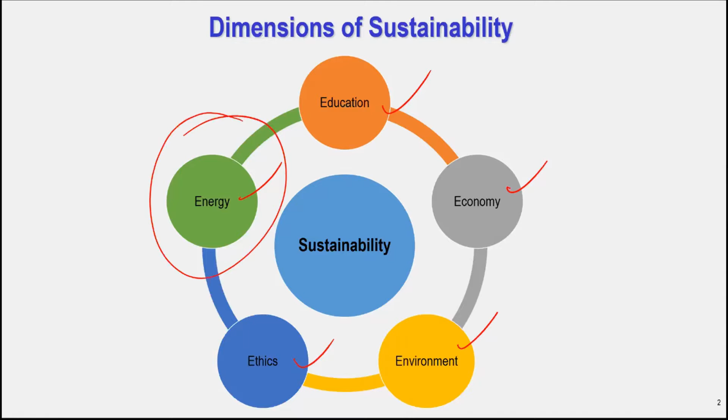So I see it is going to be very critical to study these dimensions. Of course, today my primary focus is going to be on energy. Before getting into that, we need to look at and understand what people need. People need 4 things: clean air, clean food, clean water, and clean energy.

This particular item, clean energy, affects each of these above. So really, water, food, and air are quite affected by the cleanliness or uncleanliness of energy.

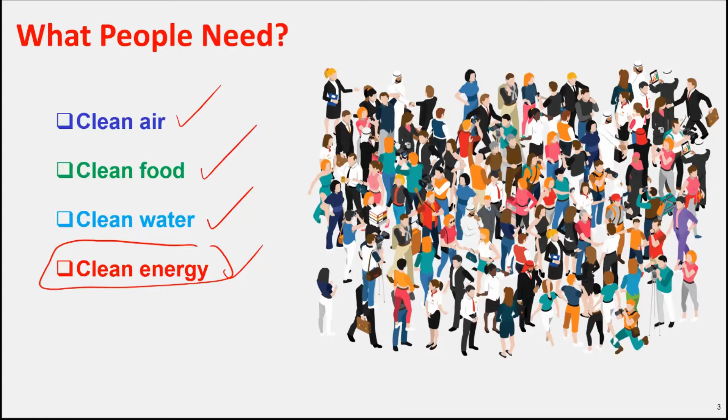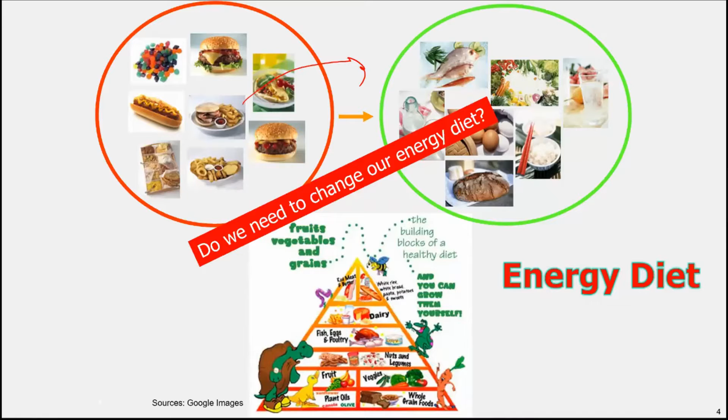And then we are now in an era where we need to change our energy diet, from a junky food diet into a healthy diet where we have renewable energy sources really deployed. And I'd like to get into this more and more now.

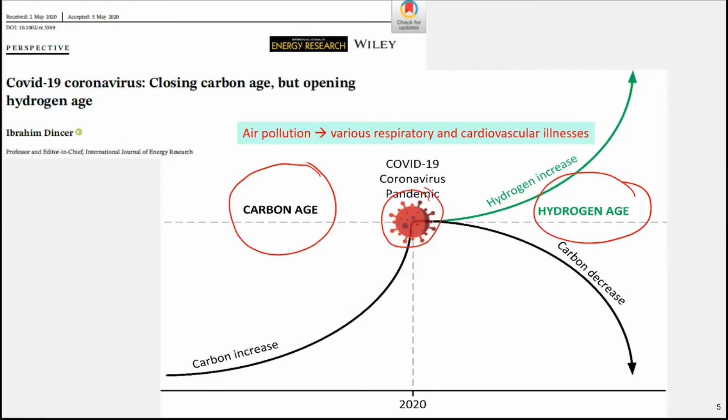I have this perspective article that I wrote just at the beginning of the pandemic in 2020, and I made it a kind of turning point, really changing the picture, a turning point from the carbon age into the hydrogen age. The pandemic has brought lots of difficulties and issues, but at the same time, opportunities for energy solutions.

And we need to look at the history of fuels. I always show this based on the carbon-hydrogen ratio. When we look at this, we see how humanity started with wood, later coal, oil, natural gas. When you look at this trend line, you see we are moving into a carbon-free period.

And this particular period is not going to be possible without hydrogen. So the key question: yes, hydrogen can be used as a fuel, and some people call it an energy carrier—you can store it, use it later, actively as an energy carrier. But more importantly, I see an even more critical role here as a feedstock.

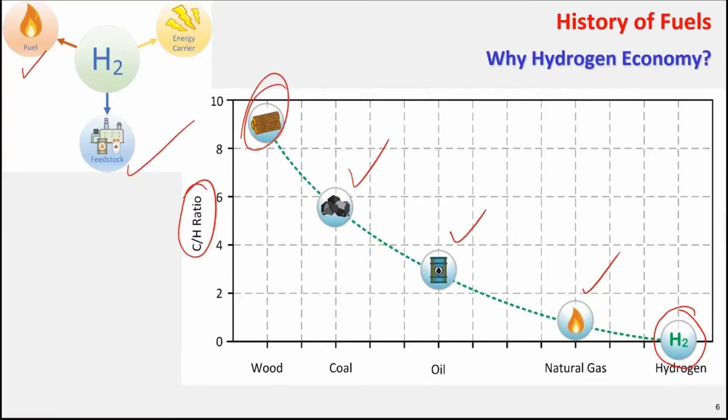When you have your hydrogen, especially clean hydrogen, you can synthesize other fuels and chemicals depending on the path you select, either with carbon monoxide or with carbon dioxide.

When we look at the sectors, really primarily the transportation sector, where we use fuels heavily, that sector is crying out. When we look at the world globally, we need to actually treat this, and we see a critical role for hydrogen to heal the world.

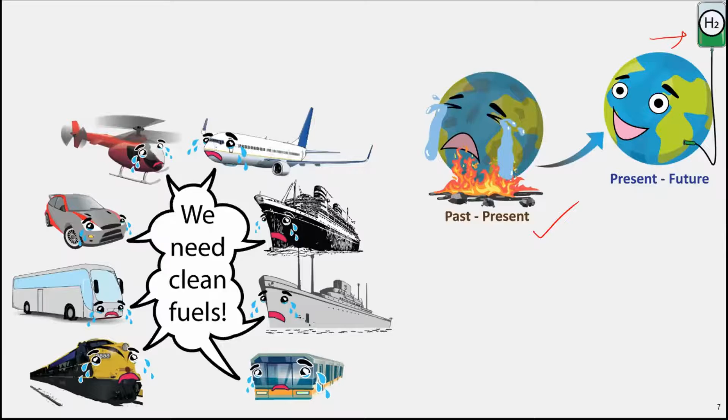So let's look at the global activities around this before getting into some specific research dimensions. The hydrogen energy ministerial meeting started back in 2018, then 2019 accordingly, same in Japan, 2020, and then 2021. The ultimate goal of organizing this and inviting leading countries to take part is a common goal: to develop a hydrogen powered society.

And various countries introduced their really appealing targets, and Japan made it very clear: in 10 years, 10 million hydrogen powered systems, including some vehicles, and 10,000 hydrogen refueling stations, etc.

And also, we need to look at the world's hydrogen production. When we look at it, in early 2019, we see it's really primarily by fossil fuels—natural gas, crude oil, coal—with only about 4% by electrolysis.

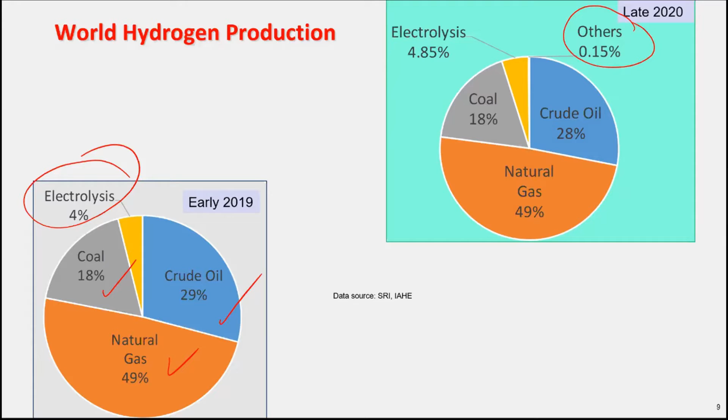And when you look at it, only a very small percentage is using renewable electricity. We also do life cycle assessment—it's really critical to look at the life cycle assessment when it comes to hydrogen production methods. And the life cycle emissions, if you try to produce hydrogen out of fossil fuels, are still remarkable.

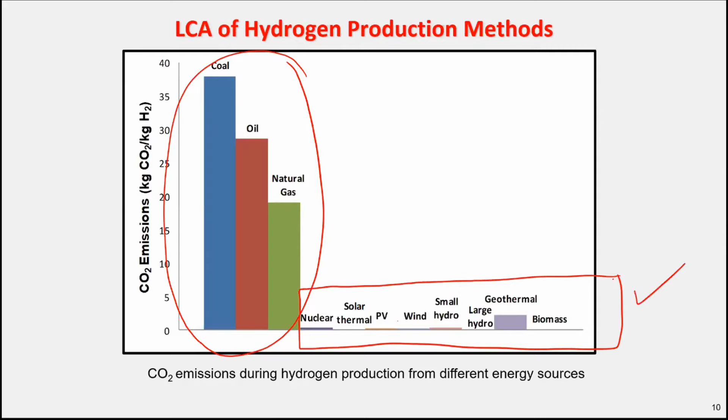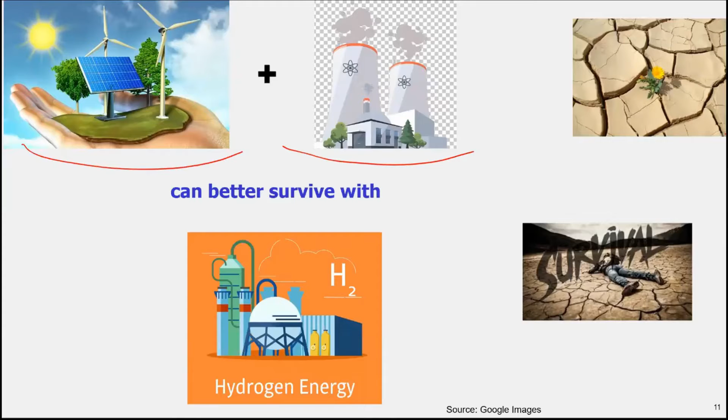And I make my equation similarly by saying that renewables and nuclear are going to better survive with the hydrogen energy options. So really, this is where we need innovative solutions related to hydrogen for implementation.

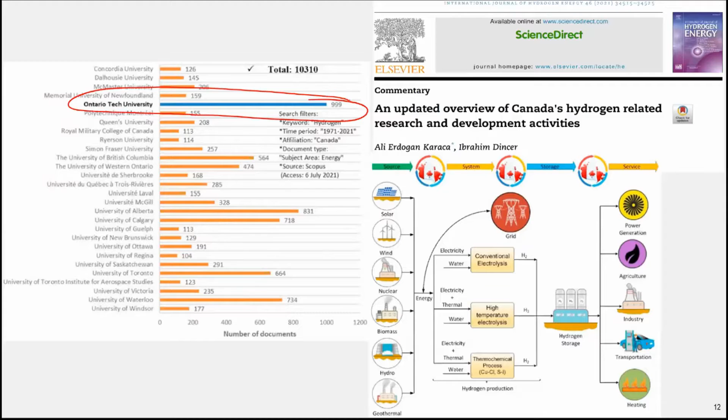Recently we have done some publications, perspectives, and commentary to look at Canada's hydrogen related research and development activities, from the publications point of view, technology developments, patents, and other related activities, and to see how well the universities are doing. We are really leading in this area in terms of publications, theses, and other related outcomes.

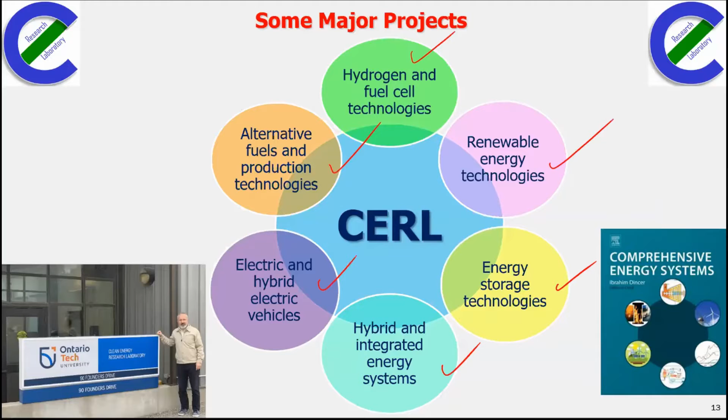In my lab, my research portfolio is quite diverse, covering hydrogen and fuel cell technologies, renewable energy technologies, energy storage technologies, hybrid and integrated energy systems, hybrid and electric vehicles, pure electric and hybrid electric vehicles, and alternative fuels and production technologies. These overall cover my research portfolio.

In regards to hydrogen production, this was actually my keynote talk in 2017, where I initially introduced the 18S concept. This concept is becoming very critical, especially when dealing with hydrogen production, looking at what items will be really critical and the domains involved. I introduced this 18S concept, starting with safety, scheme, sector, solution, stakeholder.

Overall, the 18S will be very critical, and this is going to be something very important, not necessarily limited only to hydrogen production. One may extend these to also cover storage, distribution, and primarily the final step, utilization.

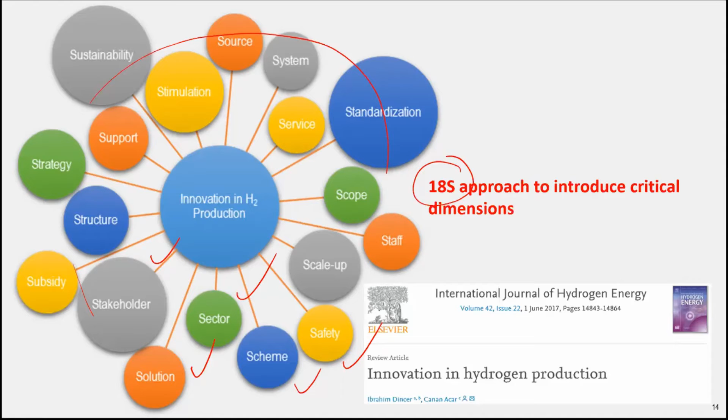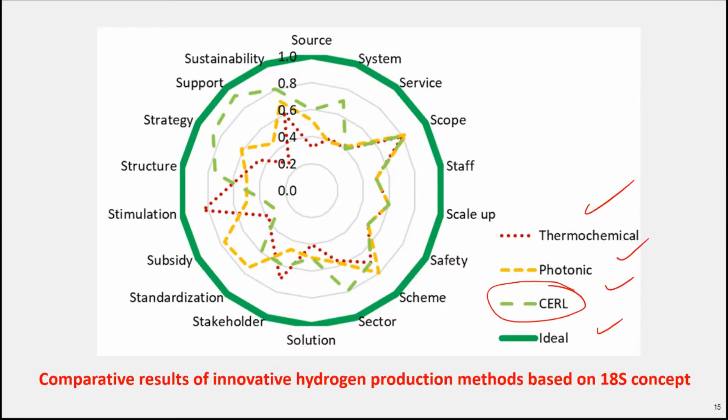We have looked at this and started doing the ranking based on technologies we have developed. The ideal case, if we take this ranking between 0 and 1, 1 is going to be the ideal case, and 0 is the worst. We try to look at all these and accordingly do the ranking for various technologies. This is just an illustration covering one of the assessments. So we have been developing technologies in my lab, trying to cover as many of these items effectively and efficiently.

At the same time, hydrogen hub development is very critical. I led a project related to a feasibility study on the development of the Oshawa Hydrogen Economy Hub. The prime purpose was really under 3S: source, system, and service.

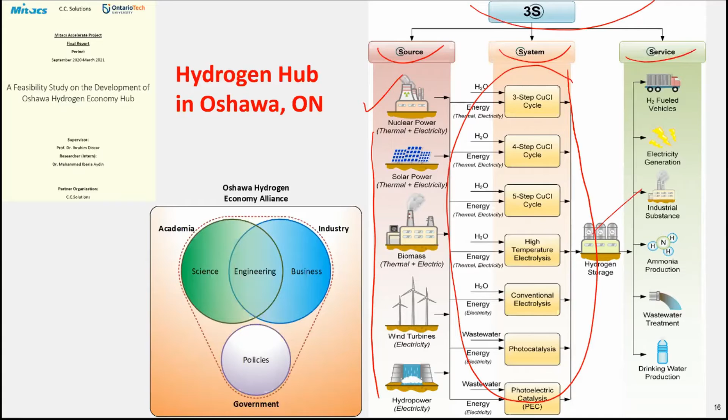For source, we looked at what sources potentially we have got: nuclear, especially in Ontario, specifically in Oshawa, and also additionally renewable energy sources. We then looked at the technologies we developed to be able to use in developing the hub. The key requirement is really hydrogen production, and then producing hydrogen and supplying it to various sectors. We did feasibility studies and compared other options: renewable hydrogen, nuclear hydrogen, and using the existing grid electricity to do the electrolysis.

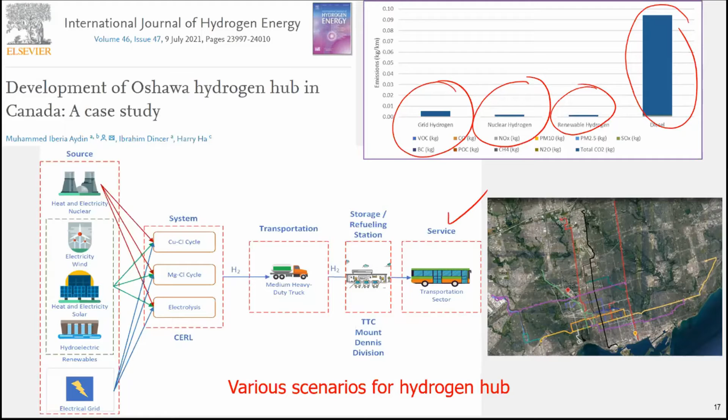The base case was with diesel. When it comes to the transportation sector, especially public transportation, because they needed this solution, we looked at having the university primarily responsible for hydrogen production, using various technologies we developed, and supplying to the transportation sector. That was the primary purpose.

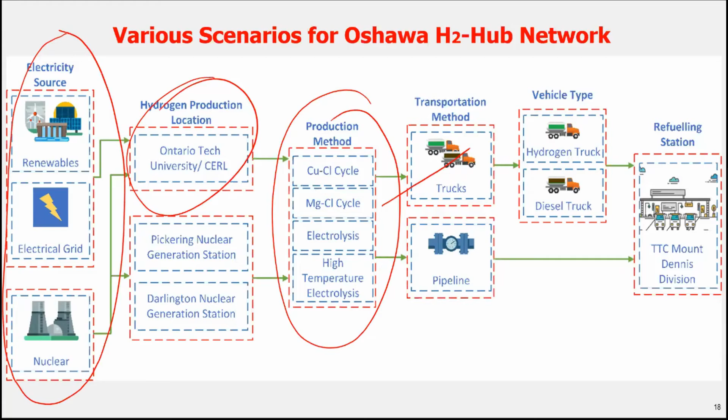As mentioned, the sources were nuclear and renewables, and also the existing grid electricity was considered in terms of comparisons.

And also similarly to look at really four cases: diesel bus public transportation, compressed natural gas, battery electric bus, and fuel cell electric bus. Technically, the fuel cell electric one is making it the most environmentally benign. But economically it's not better than battery based on current prices. But now the target is really $2 by 2030, so eventually this is going to be more cost effective.

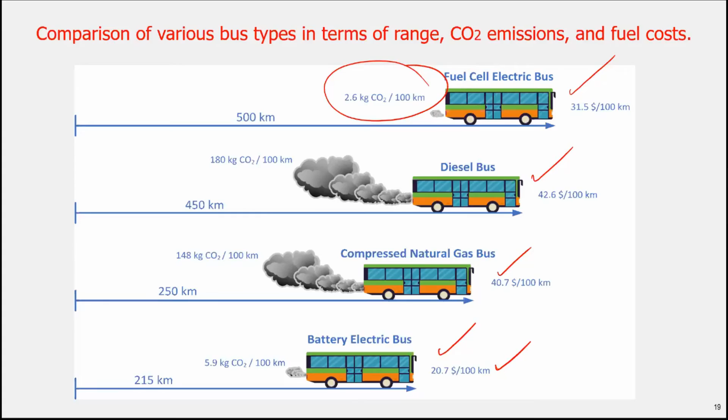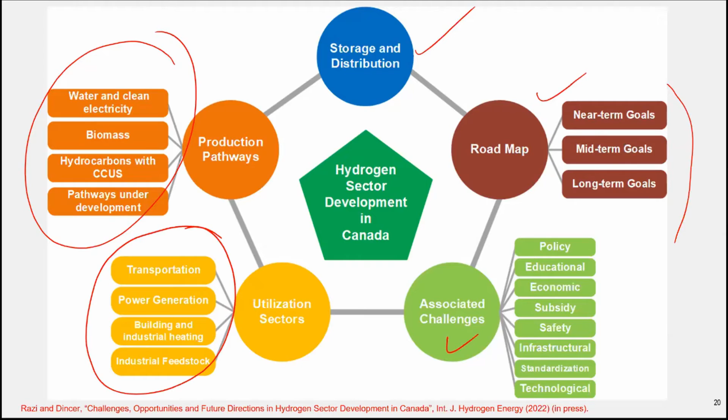Also studying various options, because sector development is very critical. I carried out a specific project for the government to look at hydrogen sector development in Canada. This item was really to look at various domains: production pathways, utilization sectors, storage distribution, and the roadmap, making it short term, mid term, long term, as Canada decided to be carbon neutral by 2050. So this is really important, developing the roadmaps accordingly, and then changes required in policy, education, economy, etc.

So becoming very critical - looked at the sector development, and also hydrogen production and distribution is becoming another important factor, including delivery and dispensing cost. We looked at various cases countrywide to see how much additional cost comes from delivery, and how much the price is affected by this. These give some additional figures in terms of compressed hydrogen or liquid hydrogen, and the delivery distance from 100 kilometer to 500 kilometer, to consider and compare.

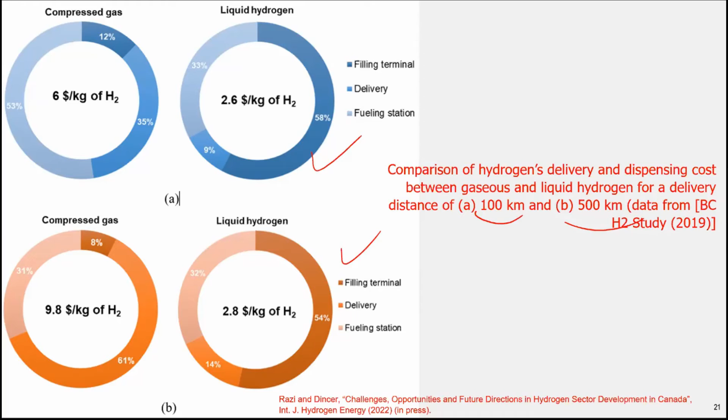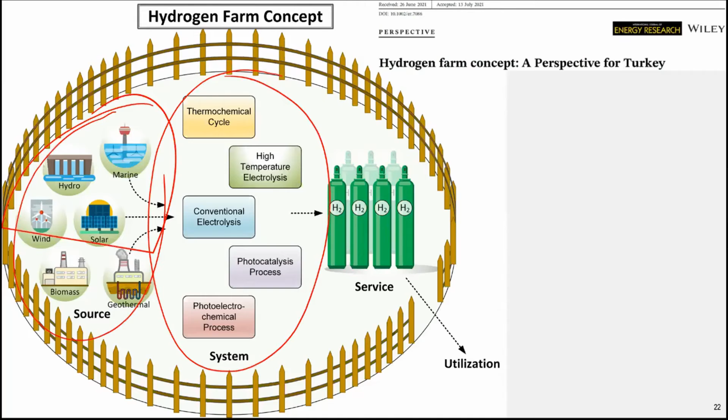Additionally, a recent study to develop the hydrogen farm concept, which I did for Turkey as a specific application and countrywide case study to look at renewables. We have the renewable energy sources, and then potentially using the technologies we developed, producing hydrogen and utilizing it in the various sectors of the country.

This was done for the country itself, looking at all renewables from solar to wind, geothermal, hydro - including large and small - and using wind onshore, offshore, and even marine and undersea currents, to look at it overall for every location and every city. 81 cities exist in Turkey, and we looked at it, including even biomass options with wastes, which are considered as well.

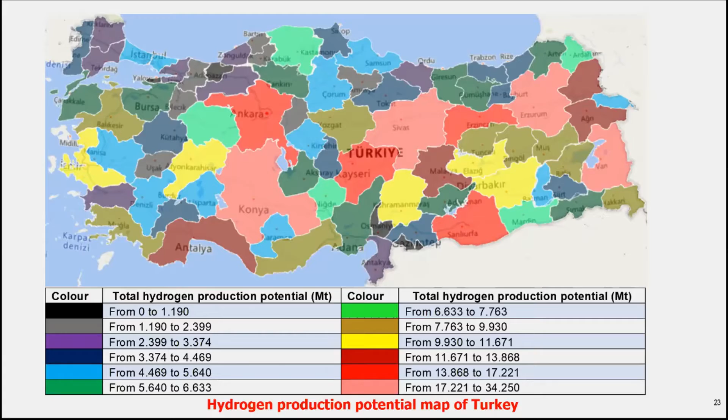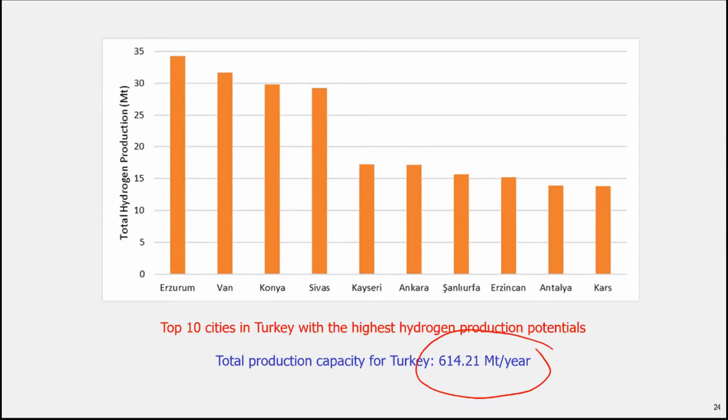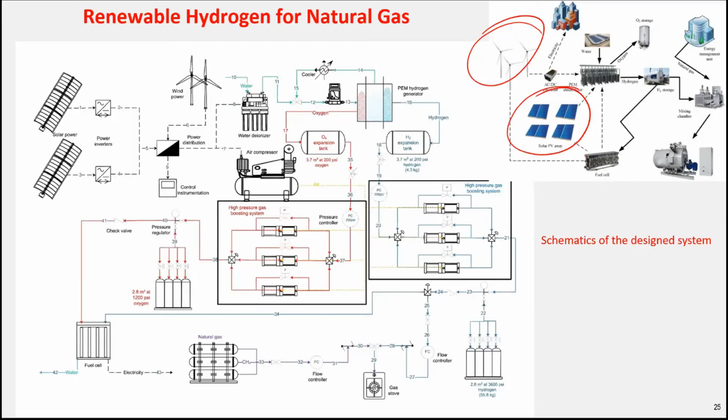Also, I led a project that was unique in terms of producing renewable hydrogen by using wind and solar together, and then producing clean hydrogen. The ultimate goal was really to blend it with natural gas, and develop this project in partnership with Gazbir, Gazmer, and also supported by the Ministry of Energy and Resources in Turkey. So doing the pilot study, mixing hydrogen with natural gas, conducting performance tests and emissions tests, and doing the evaluation. The results were quite encouraging.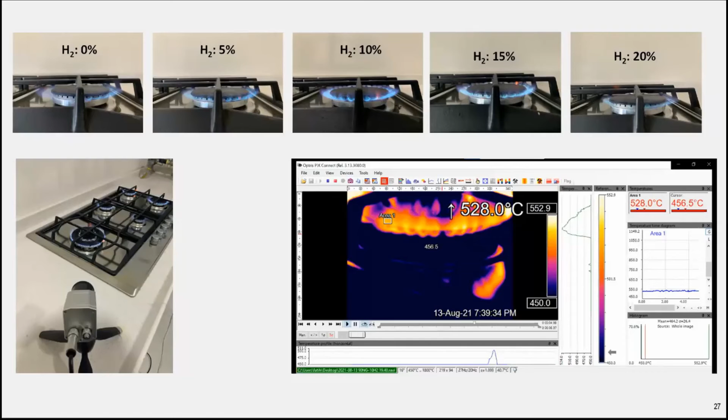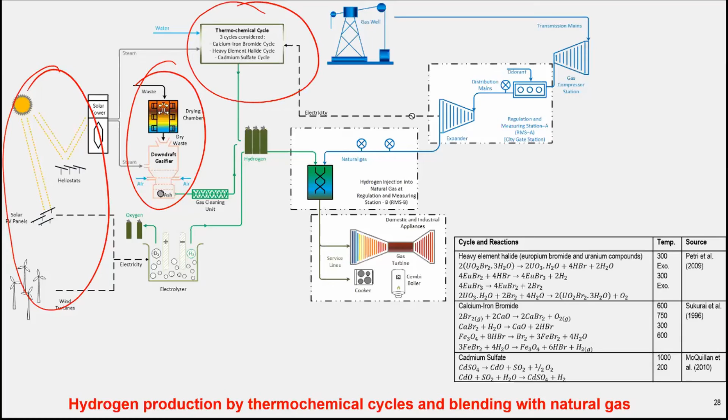You may wonder in what percentages - doing it by volume, mixing hydrogen with natural gas up to 20% by volume. We also looked at various additional options for renewables, and gasification where we have wastes available, even with thermochemical cycles, bringing them into this and doing these studies as well, and we have published them.

In my lab, additionally, we have been looking at other additional options. This is one integrated cycle - we have had a large consortium to study and develop the copper chlorine thermochemical cycle for hydrogen production. This was in partnership with Atomic Energy of Canada Limited; later the name became Canadian Nuclear Laboratories, and we continued developing this. We also developed photoelectrochemical methods for hydrogen production, with 18 innovative reactors. I have a solar simulator and solarium in my lab to look at the aluminum water chemical reactions.

And the prime target was how to use waste aluminum for hydrogen production. This was something additionally developed.

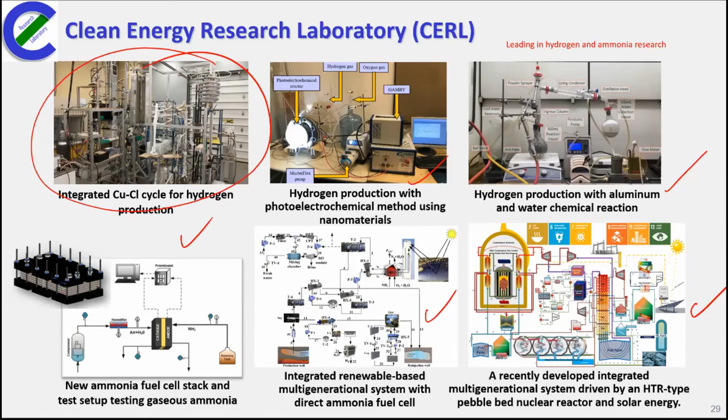And then also new ammonia fuel cells, really developing these cells and stacks in my lab, and also integrated energy systems, primarily targeting even communities, where we have to cover nuclear and renewables together, bringing them in to solve community problems, and also not just for supplying energy in terms of power, heat, cooling, but also fresh water, even food, from greenhouses to fish farming.

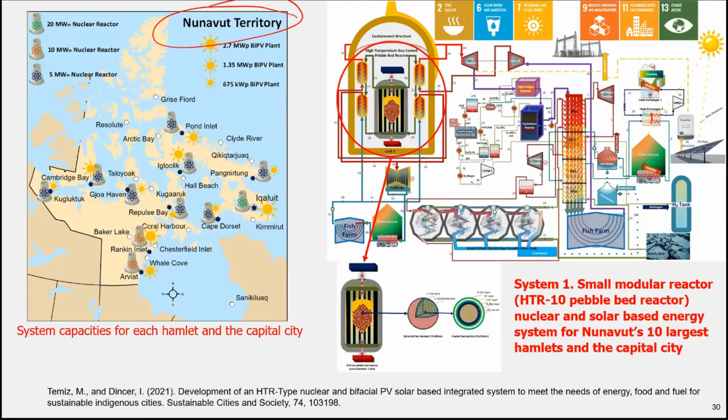And develop one particular project for an indigenous community, an Aboriginal community, targeting this Nunavut territory, where we did this with small modular reactors, and developed this study.

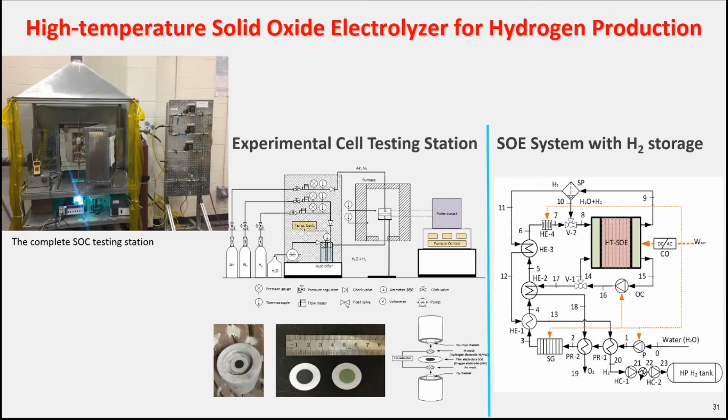And then also high temperature electrolysis is very critical, and we have been developing the technologies. This is a very important, very effective, very efficient hydrogen production method, suitable for, in this case, with nuclear, where we have high temperature heat, even with solar, where we have high temperature heat that can be utilized in this.

Also, another important topic we have been working and developing technologies on. This is something more mechanical, using ultrasound or ultrasonic sources. And really what we normally do is develop this kind of wastewater treatment, taking the wastewater, for example textile, and we can do treatment ultrasonically, and more importantly we clean the water, and then later produce hydrogen by using ultrasonic waves — basically sound waves to be able to disassociate the water molecules into hydrogen and oxygen.

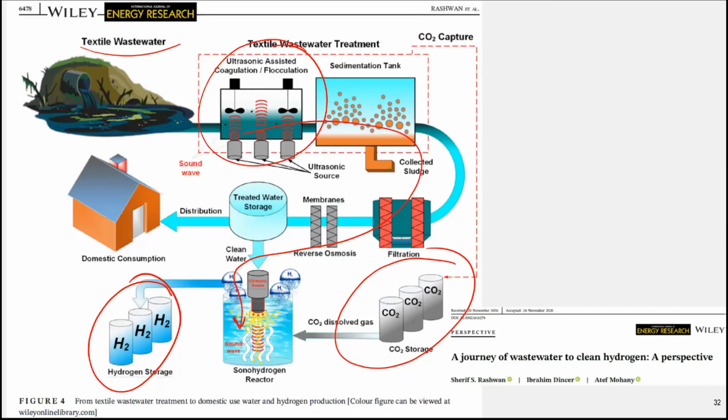And also we have discovered something very interesting: carbon dioxide was really increasing the production efficiency. That was very interesting, and we published that particular item.

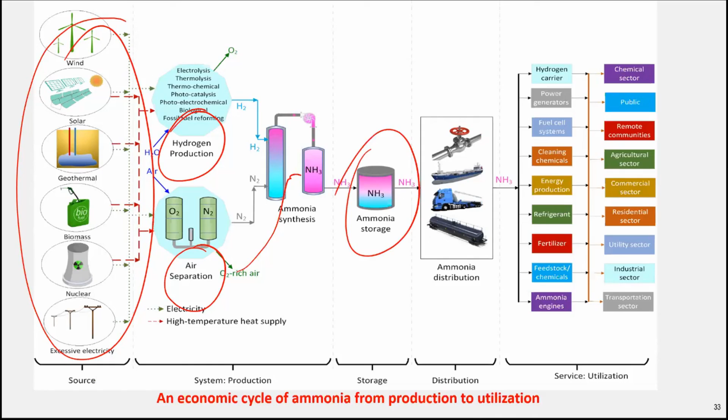And also to look at it, because when you have hydrogen in hand, what do you do, you go one more step ahead to look at other solutions. We have, of course, renewable energy sources producing hydrogen. And what we do, we separate the nitrogen from air, and then synthesize hydrogen and nitrogen into ammonia. Developing these, we have commercialized even some critical technologies, serving various sectors. As everybody knows, ammonia is extensively used in various sectors, from agricultural to refrigeration, even other chemicals areas, so really heavily utilized.

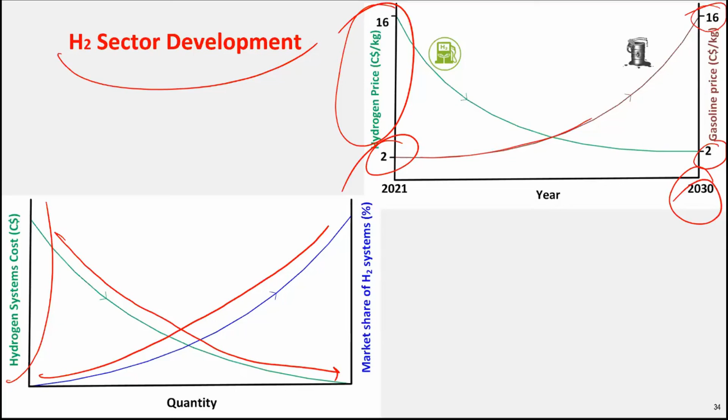And I did this comparison with gasoline. Gasoline is right now in Canada $2, and because of the carbon tax and other things, there will be other penalties included, so it's expected the cost by the year 2030 will go up to $16. So the picture is going to be really reversed that way.

And then finally, sustainable development is very critical, and we need clean energy solutions, and clean energy solutions will require nuclear and renewable energy options to be considered, especially for the hydrogen economy. So the hydrogen economy is going to be very critical in this. And we should also keep in mind that developing hydrogen hubs and hydrogen farms will be very important and necessary.

Clean fuels — when we have hydrogen, we can use it as a feedstock to be able to produce other clean fuels, such as methane or natural gas, renewable natural gas, methanol, ethanol, ammonia, DME, and many other types of fuels and chemicals. And at the end, we really need to develop clean community energy systems.

So we need to look at community-based solutions. These are going to be very important, and I think it is the right time to stop and entertain any questions you have got.